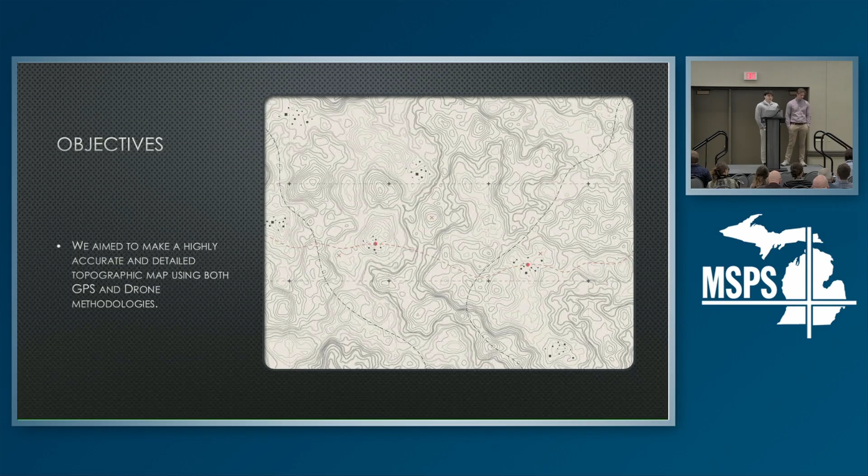So the objectives: we aim to make a highly accurate and detailed topographic map using both GPS and drone methodologies. With the GPS, we took roughly 5,250 ground shots throughout the entire field, which made our tin, or surface.

And with the drone, we used roughly 620 pictures with 5 different targets across the field. We aim to compare both by using 9 completely separate check shots through both of the surfaces with the same coordinates, but we wanted to compare elevation.

So we attached both of those with the same coordinates to each surface and then subtracted and found our Z value, which you'll later see.

So the equipment used: we used a Leica GS-18 rover and a Leica GS-18 base station, a Leica CS-20 data collector. For the drone, we used DJI M350 with RTK, and for the software, we used Pix4D for the drone. We used Trimble Business Center to adjust our LAS files, and we used AutoCAD for the rest of it.

And we'd like to thank Surveying Solutions for letting us use all their equipment.

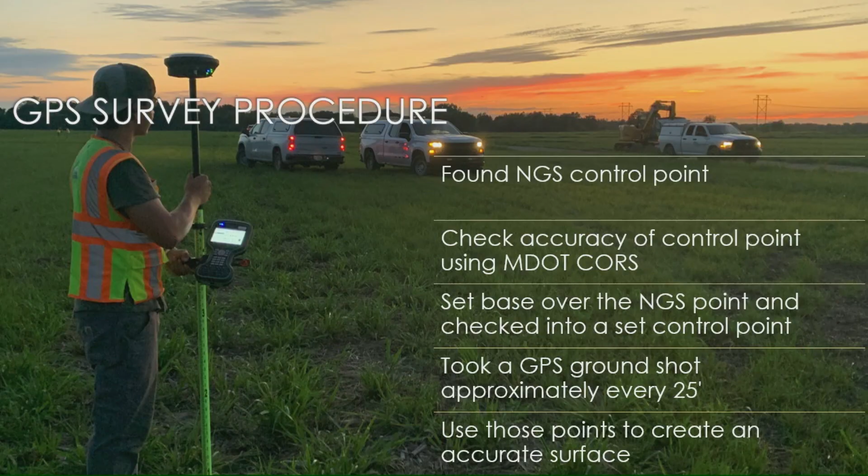So our GPS procedure: we first started by finding an NGS point and checking it with our CORS. We then set the base station up on that NGS point. To start our control loop, we set all of our control. We then rechecked into our NGS point and moved our base station to the control.

Then we started taking GPS shots roughly every 25 feet throughout the 80-acre field, and we used those points to create our surface. This took 2 days, so we made sure every day we checked back in with our control to make sure everything closed right.

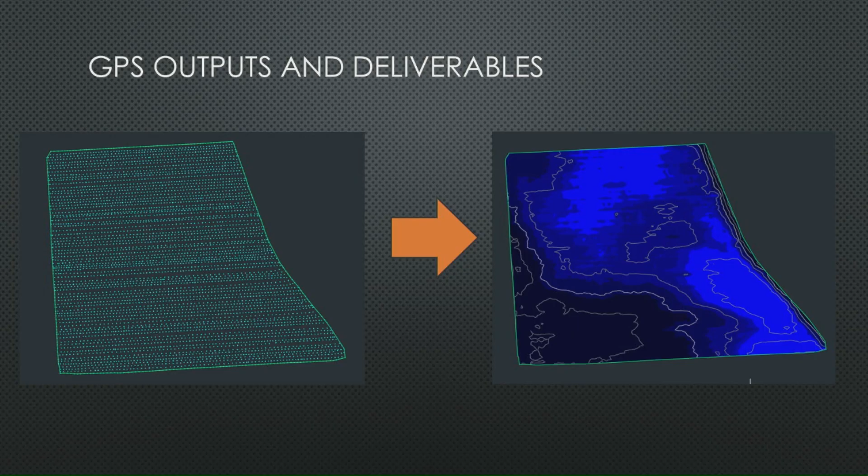So our GPS outputs and deliverables - as you can see, there's some human error, but it's roughly every 25 feet that those 5,250 shots were taken. That created our tin surface, which gives the contractor a good visual of what the field should look like, what it should be designed like, if there needs to be slope adjustment, anything like that. And the good thing about using GPS is you get to select the exact field limits.

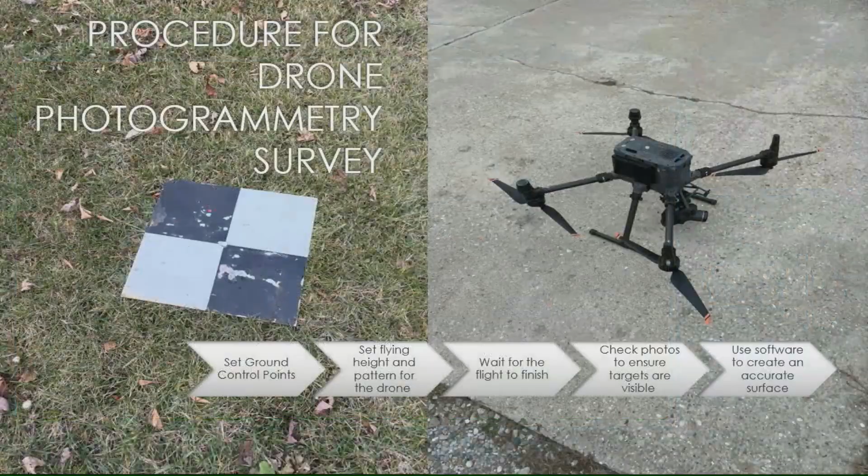Okay, so for our drone survey, we first started by setting 5 targets throughout the field, 1 on each corner and 1 in the middle. Then we set our flying height at 350 feet. We did 80% front lap, 75% side lap for our flight.

We did a single grid pattern. This made sure that we hit every part of the field. We had lots of redundancy in our photos. We started the flight, and it took about 2 hours for the flight to complete.

When it was done, we checked photos on site to make sure all the targets were visible and that everything looked okay, so we didn't have to come back. Then we brought our data into Pix4D to create our surface, Trimble Business Center to create a point cloud, and AutoCAD Civil 3D to draw our contours.

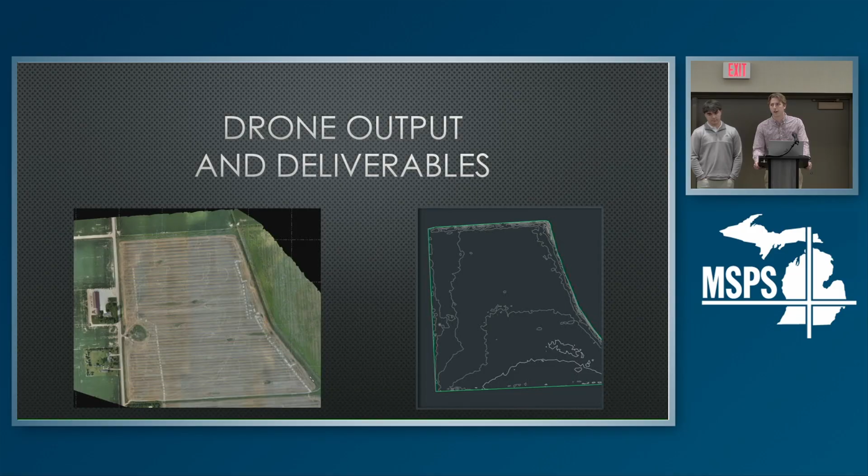So one advantage of using the drone is that we got 3 deliverables from this. We created an orthomosaic image, which provides the client with an up-to-date, detailed, high-resolution picture of the entire project site. We got our topographic map, which was the main deliverable that we were looking for. And then we also got a 3D model of the entire site. This allows the client to zoom into any areas they want to, look at it in depth, and get a really good idea of what the field looks like without ever having to drive out there.

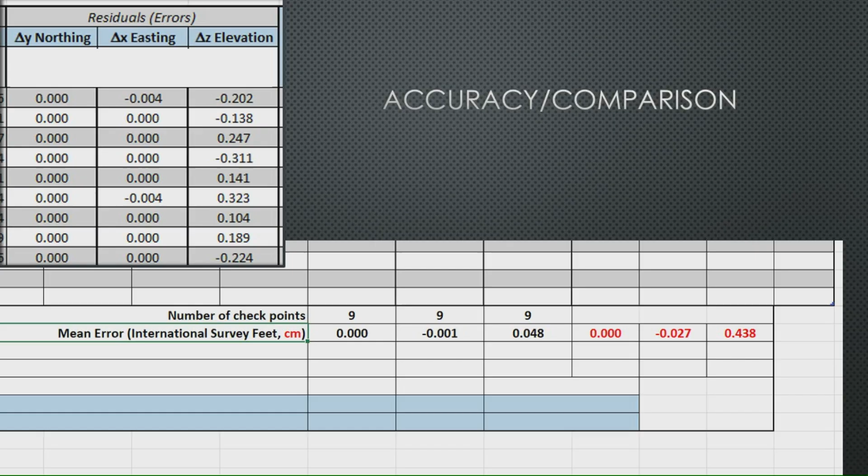So to compare accuracy, we took 9 check shots throughout the field. We laid the 2 surfaces on top of each other and pulled elevations from both surfaces. And right here's the difference. There's a couple tenths at each check shot, which we were happy with. And then our mean error throughout the entire field was only about 0.05, a little over half an inch, which we were very happy with. This gave us confidence that we performed the survey correctly, and we were happy with those results.

So to compare the cost, we just tracked our hours. With the GPS survey, it took us about 48 hours in the field to drive there, topo, drive back. About 10 hours to process all of our data, and that came out to a total of about 58 hours of work. The drone, we were able to complete in one 12-hour workday, another 10 hours of processing data, so that came out to about 22 hours of work, so it was much faster, much more efficient to use the drone in this project.

Weather can be a problem. Our pilot said high wind speeds, even though our drone has RTK, can really throw off the results and give bad results. We got lucky in this project. The day we planned to fly, we had perfect weather. And then another problem with the drone can be large data sets. Just with a single grid pattern, we got a lot of data. We crashed our school computer like 3 times trying to process all this data. So that can also be a problem using photogrammetry.

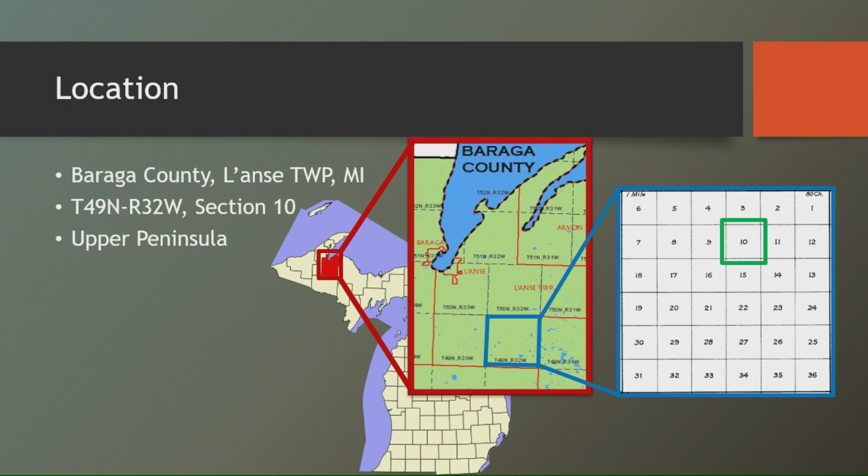So you can see here, it was in Baraga County. Specifically, we're in L'Anse Township, up in the Upper Peninsula, which is where I'm from. Specifically, we were in Township 49 North, Range 32 West. And as I said, we were working out of Section 10.

So some history of the area. The township lines were laid out by William Austin Burt and 4 of his 5 sons. I got 4 of them on some of the LCRCs in the area. The section breakdown was done by Guy H. Carlton. I have 4 LCRCs from 8 corners on this section, and then a Remon map as well.

And one thing I thought was funny that I found while digging through the LCRCs: these corners were done in 2002 by the DNR. And Steve Siskowski, who did all these corners, on corner H5 wrote in his notes that Guy Carlton seems to have laid out many short miles in this township. And I just thought that was a funny thing to include in your LCRC.

So just kind of the meat of what we did. We started really early in the season. As soon as I got up there after the school year at the beginning of May, we immediately went to research, which is just pulling GLO records, adjacent surveys, basically anything that pertains to these corners that has information is useful. And then after we get all of that, it's just about drafting it up, prorating distances based on the GLO notes and recorded distances, which gets a little tough sometimes if there's nothing since GLO has been filed, which is an issue in some of these areas.

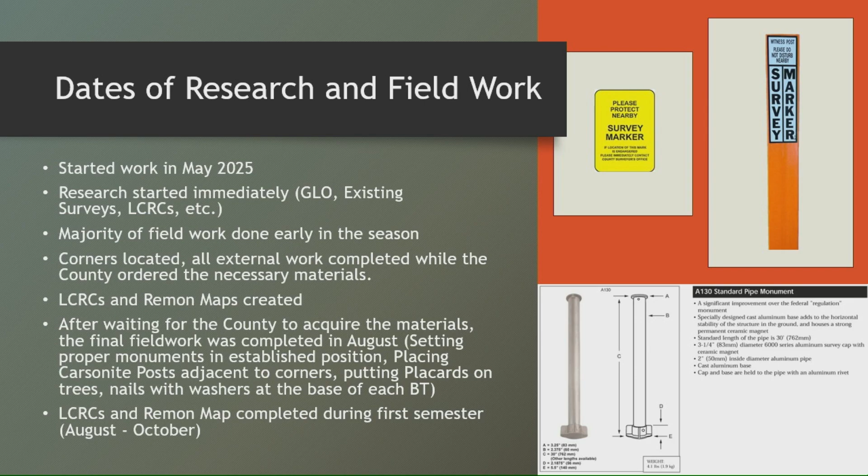So yeah, it was mid-August once they finally got all that stuff to us. And once we went back out to the corners and got all those put in, then we had the rest of the time until the peer review group to just tune up the LCRCs and get the Remon maps to where we wanted them and everything.

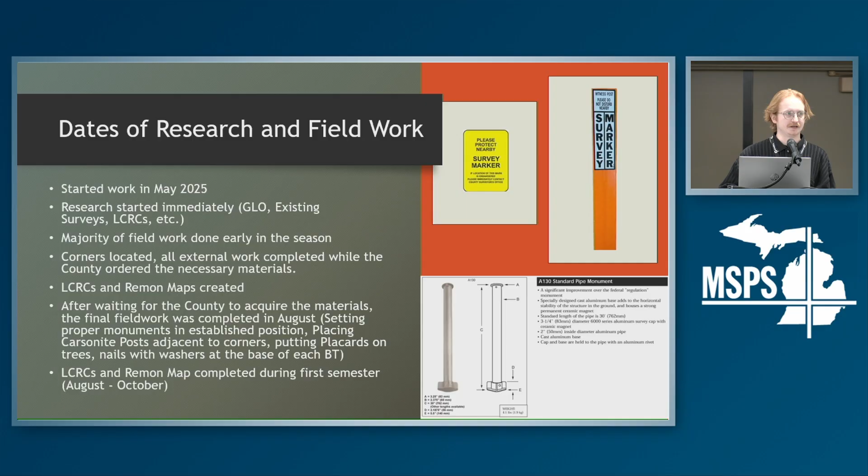So as far as the terrain and the conditions, it was unusually hot and humid for the summer. I've been in the UP pretty much my entire life, and it was definitely one of the hotter summers I can remember. And there was also intense fires in Canada, so there was some pretty bad smoke all summer as well. The terrain varied. There was rugged mountainous stuff, there was low swamp, there was open hills, and there was dense scrub brush. Pretty much everything that the UP has to offer is right there for you in Baraga County.

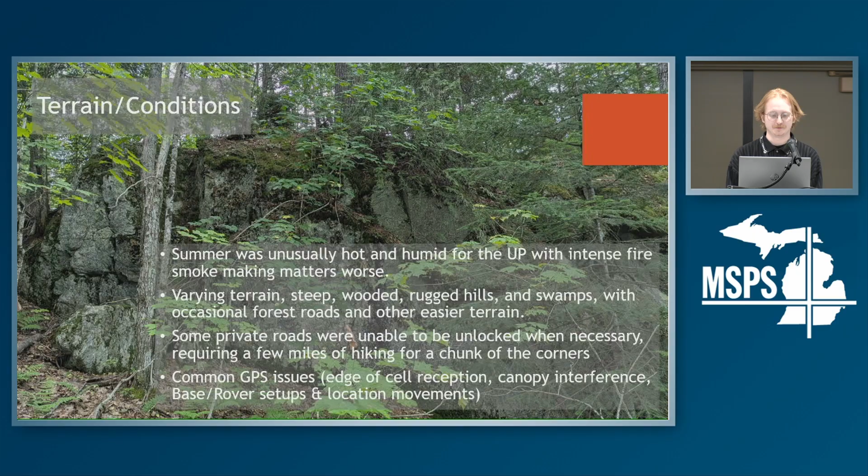Multiple times we found private roads locked behind fences that we weren't able to get access to, but on the bright side, walking on a road is a lot easier than a lot of other hikes can be. And then just out in the woods, a lot of common GPS issues. I mean, there's dense canopy. Like I said earlier, we were on the edge of cell service, so VRS is really spotty. And then when we did set up the base, it's tough to find a good spot, and often we would have to move locations as well.

So I had to work closely with Chris on this because I didn't really have a gauge as to how to even estimate what it would take to do this kind of project. So this is one of those areas where he was a vital resource. And so the total guesstimation we came out to was 102 personnel hours. And the actual personnel hours came out to 116. So I would say we came pretty close.

I had a great time with Remon. I'm really excited to do it again this summer. I think if I were to do it again, I could hypothetically get those hours a lot closer to the estimation. I just had a lot of learning to do this summer, but like I said, I had a great time, and I thank you for letting me share it with you.

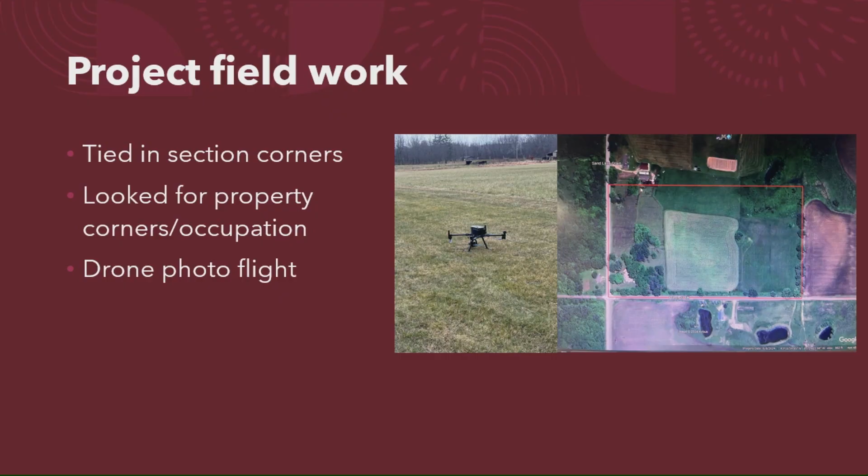A little bit about the office work. Did some drone flight processing using PixElement, and as I said, I did do a photo flight as well. Currently still processing that, had the same issue as the first group, keeps crashing the computer at school, unfortunately. Drafting the project in Civil 3D.

A little bit about the local requirements. It's in Nelson Township in Kent County. So Kent County Road Commission and Health Department. The Road Commission requires that each new parcel has at least 100 feet of road frontage. Currently I have 264 for the frontage, so looking pretty good on that front.

The Health Department requires that each new parcel also has a new permit pulled for a new well, new septic, and site inspection. So subject to that as well. Nelson Township also happens to have its own land division ordinance, minimum lot size being 2 acres with a depth to width ratio of a maximum of 4 to 1.

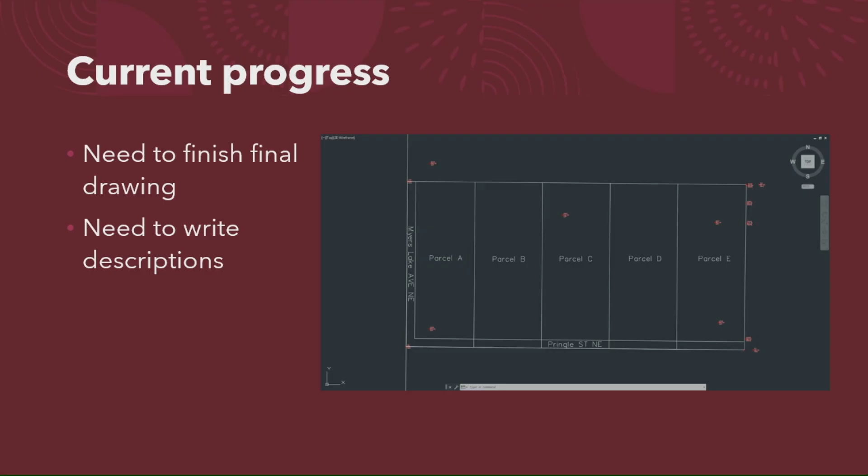So a little bit about the current progress. Need to just finish up the final drawing. Currently, it's not annotated, as you can see, but lot size being about 264 on the frontage and about 660 in the back for the depth. So it meets the 4-to-1 ratio. Like I said, it was a 20-acre parent parcel, so each new parcel that I'm describing here is going to have at least 4 acres. And then just need to write the legal descriptions.

A little bit about the cost analysis. This is just what I figured it would take. Took me a lot more, believe it or not. Research and review, 6 hours. Field, 8. Office, 8. So I figured about 22 hours total. The cost, I just put some numbers up there.

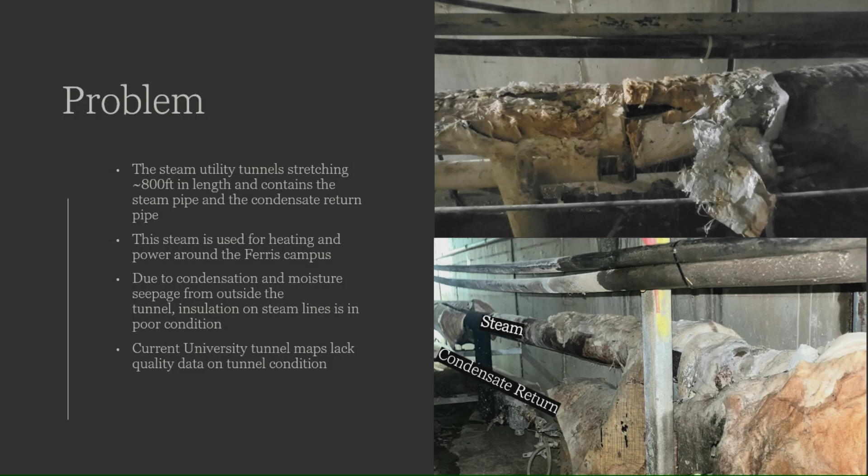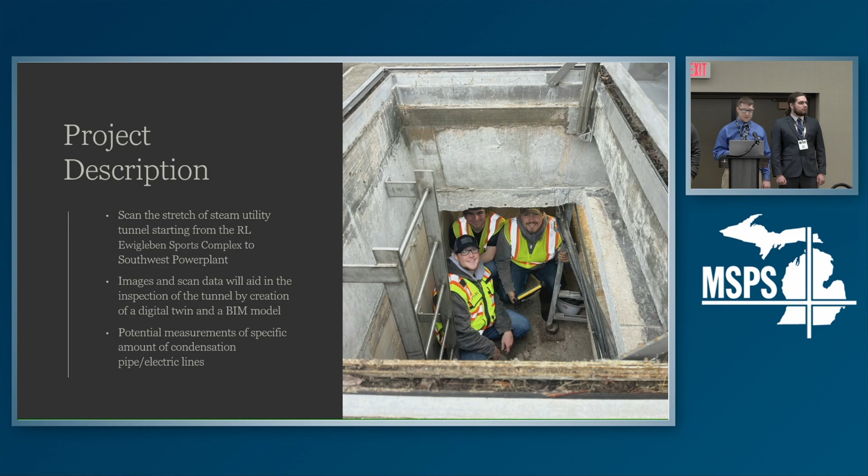So the description of our project, we plan on scanning that 800-foot stretch of the utility tunnel with the Trimble X9 LiDAR scanner, and then we would use the images and the point clouds collected to aid in inspection and make a clean 3D model of the tunnel. And like I said, the deliverables, we're going to look to make a BIM model and then potentially a 3D walk through the tunnel. And with that, I'll hand you off to John.

Thank you, Mr. Farmer. So my portion of this project, I primarily dealt with the practical scanning. So I was down in the tunnels running the X9 scanner. And this took us 38 scans in total, 20 foot between them over around 800 feet of tunnel. And that spacing I decided was going to give us the best overlap to get our point cloud out with enough space between it to make a nice surface out of, along with making it so I'm not spending 500 hours down there scanning every 5 feet.

We auto-registered scans to each other in the field with Trimble Perspective, which meant we didn't have to set control at every scan, and we didn't have to go through and pick it out once we were done. It was just everything linked up with itself. So that saved us a lot of time, and then we geo-referenced our scan via control at the hatches, which we'll get into later.

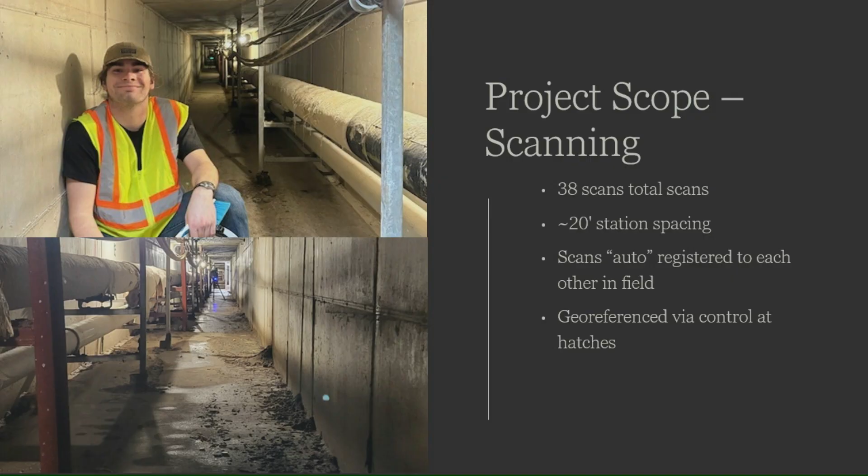So equipment used, we used the Trimble X9 stationary scanner and a TX10 tablet provided to us by Seiler Geospatial. And here you can see Mr. Farmer down in the tunnel moving it. This is a good example of how we were actually doing this. We were setting it up, hitting the button, scurrying away as fast as we can so we're not in the scan, letting it do its thing, and then going and moving it again.

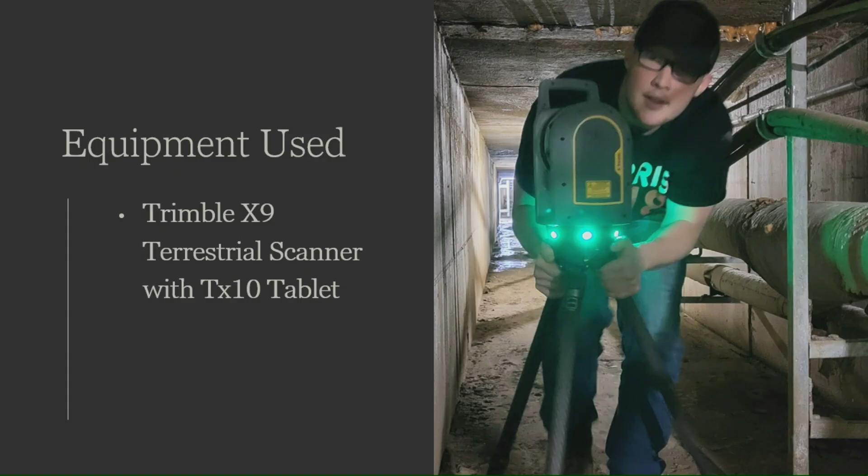For the raw data, we ended up with 187 million points. Here's a picture of what I'm looking at in the tablet when I'm down there, making sure each scan's registered correctly. We had 3.1 millimeters of error with an average overlap of 62% and a 98% consistency, which I think was pretty good for our application.

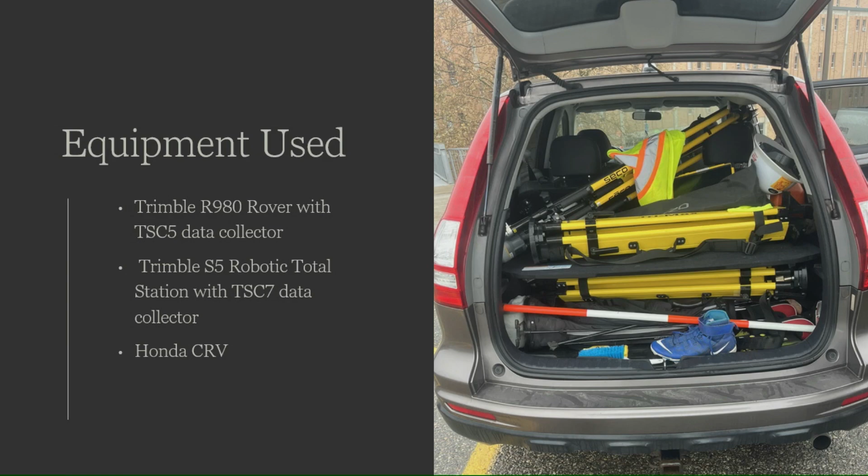For the equipment we used a Trimble R980 Rover with a TSC5 data collector, and a Trimble S5 robotic total station with the TSC7.

Some of the issues we faced were GPS errors, which you may know about. And then there were scheduling conflicts because every time we had to go in the tunnel, we had to be supervised by staff, so it was challenging to have everyone on the same page.

We were also reminded that it snows in Michigan. So when you go back to the control point you've had and there's a big old snow pile on top of it, that can also be a challenge.

The 3 main softwares we used for processing were Trimble Business Center for our point cloud, Autodesk Recap, which we used to make a preliminary mesh, and Rhino 3D for our BIM model.

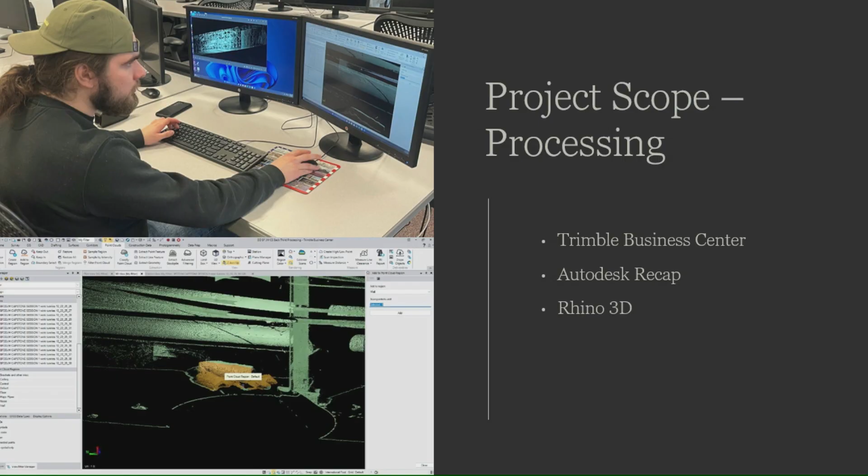For processing in Trimble Business Center, the version we have has an auto classification that you can use for indoor, and it only does the floor, ceiling, and the walls. So we had to manually go in and extract all the pipe and these brackets, as you can see.

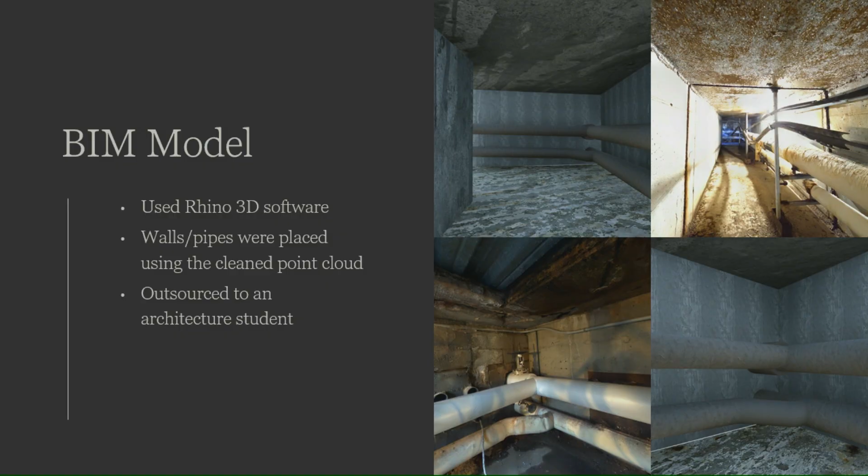For our BIM model here, you can see in the pictures it's side by side with the BIM model and the pictures from the actual LiDAR scanner in the tunnel. You can see those main features we extracted from Trimble Business Center, being the floors, walls, ceilings, and the pipes. We still have to add some details, like some of the valves and the brackets.

Those were a pain to extract and classify the point regions in Trimble Business Center, along with all the noise that was in there.

So we ended up using Rhino 3D software. We had a lot of difficulties trying to figure out how to make a BIM model because between the 3 of us, we had 0 experience doing this. It was definitely a learning experience. But luckily for us, we have a good friend in the architecture program who uses models like this all the time, so he ended up bailing us out and helping us make this 3D BIM model.

So the overall issues: like I said, we have a lack of experience in this area, and that's one reason we chose this project, so we could get more experience with LiDAR scanning and these 3D models.

And then finding a usable software for a BIM was also challenging.

So overall time, we had a lot of time, in total 84 hours. We had a lot of time spent in research and processing, and we definitely could have cut down on a lot of that if we had the experience to do this project beforehand.

If we were to do it again, we would have known what softwares to use. We would have been able to establish a good workflow going from TBC to Autodesk to Rhino 3D, and we would have had a better game plan going into it. That would have helped a lot.

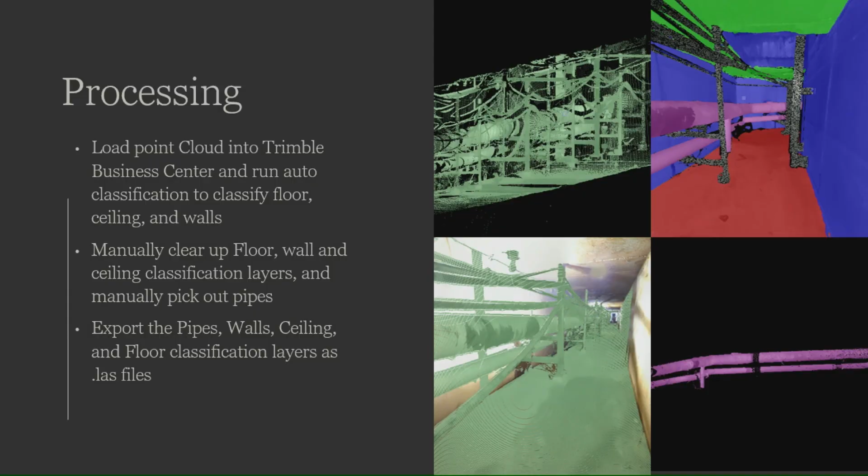If you're paying attention, you can mitigate it. Sometimes we use the case of the scanner itself, since you can see it in both views, and you can just pick it on either side, moving along with each scan. We could also use the ladders, since you can see them from a lot of different scans, so you can hook onto a ladder as one of your points, and then choose a similar bracket holding the pipe and wires as well. Those would work very well for doing this.

When you guys were going through this, did you play with the scan density to see if there was a difference in the best way to proceed at a quicker rate and still get a good amount of data? We didn't really mess with scan density, I was happy with where it was at. It was taking 2.5 minutes to get through the scanning portion.

The photos were what would eat a lot of our time because it was low light, and we wanted to have photos for when we're going through and classifying it from the scan view. It makes seeing what things are a lot easier. But since it was low light, the exposure would have to be turned way up, and it'd take around 10 minutes to get photos, maybe a little less.

Good question. One of your slides showed a relatively small access port. Was this considered a confined space, and did you have to go through any training in order to do that? No, we had our supervisor from HVAC there, and we pretty much did what he said: wear a hard hat down there most of the time, watch your head when you're down there, don't touch the steam line, it'll burn you. That was about it.